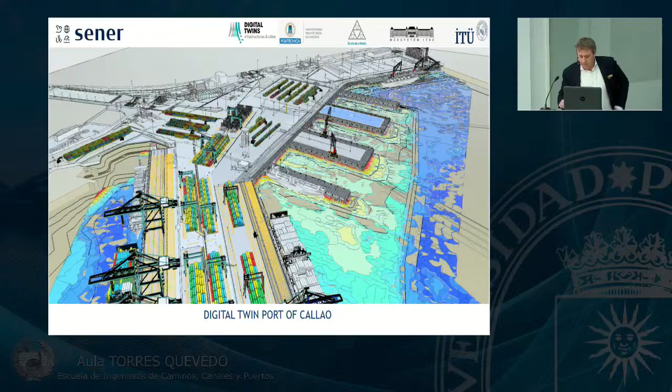Thank you, Ivan. Thank you, all of you. Okay, here we have the presentation. I will move a little bit so I will appear. I hope I will appear on YouTube also.

Today, I would like to introduce you to our project of the digital twin. It has been developed since 2018. We started working on that in 2018, and you will see our evolution. I have prepared a brief presentation, and after that we have 10-15 minutes for any doubts or consultancy that you have, so please take notes for the questions later.

First of all, this is the agenda of my conference today. I will give a brief summary about SENER, because maybe some of you don't know SENER. Then we will talk about digital twin - I have put a question mark here because all of you talk about digital twin, but I think we should agree on what a digital twin is. After that, the main purpose of the presentation is the use case of the digital twin in Callao Port, and finally we will have the Q&A.

So just a brief introduction on SENER. SENER is a multidisciplinary engineering firm that was founded by two brothers in 1956 in the north of Spain, in the Basque Country, in Getxo.

Okay, right now we are more or less 3,305 people working in SENER in more than 20 countries in the 5 continents. We have more or less right now projects in 90 different countries, which gives us a global overview of what is a project and what are the requirements of our clients.

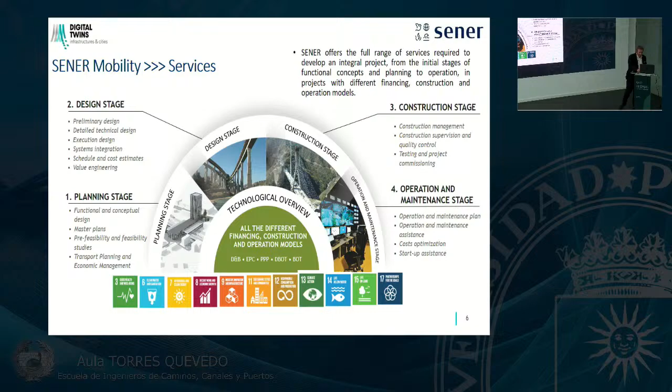And this is why we were one of the first companies in the world to develop a digital twin that is today what I will show you. In SENER, we are in digital engineering from the very beginning.

We start in 1967 with a software developed by SENER, called Foran, CAD/CAM software, 3D software, in 1967. So we have a large track record, more than 50 years, working in 3D in SENER.

First was the design of vessels. Then we moved to the aerospace and the energy. And in mobility, in the infrastructures area, our first BIM project was in 2006.

In 2006, we had 3 different 3D modeling BIM projects. One on a building, the high-speed station in Barcelona, then another high-speed in Logroño, and finally it was also the first port project in BIM. It was Hutchison Container Terminal in Barcelona, now called Best Terminal in Barcelona.

We were participating in that project, and we decided to implement BIM in that project. So the origin of SENER working in BIM, which is a part of a digital twin in ports, was in 2006. So we have a large track record working in BIM and digital solutions in ports.

Then we move, in 2012, we start doing BIM consultancy for others. Due to our experience inside, we are doing also consultancy services for our side. Then the BIM management and the digital project delivery. We create the BIM office in SENER in 2017.

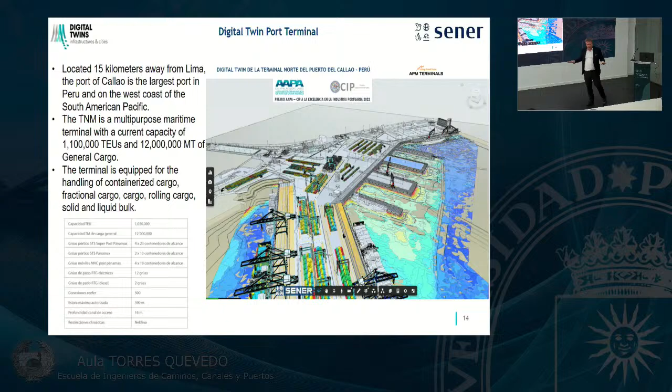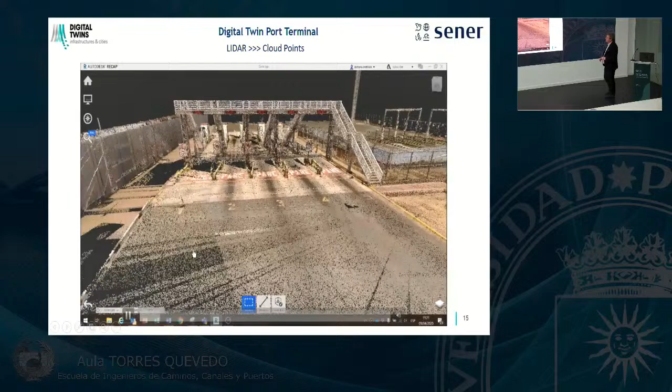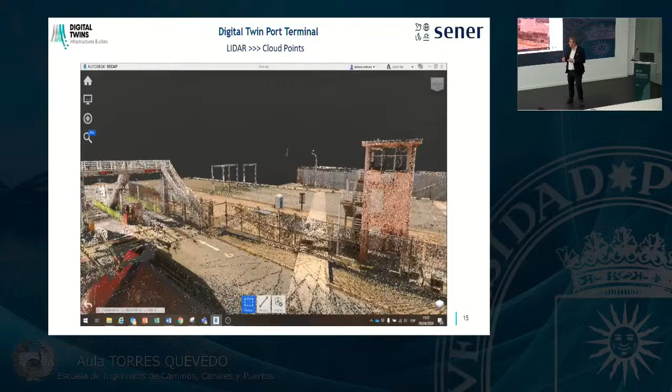With LiDAR, we scanned the whole terminal. We have a lot of cloud points with LiDAR, and also 360 photos that we did with our helmets, plus some sketches done by our team on site. We were able to build a 3D model of the terminal. The origin was a LiDAR scanning of the whole terminal. So with the LiDAR scanning and the 360 photos, we were able to build...

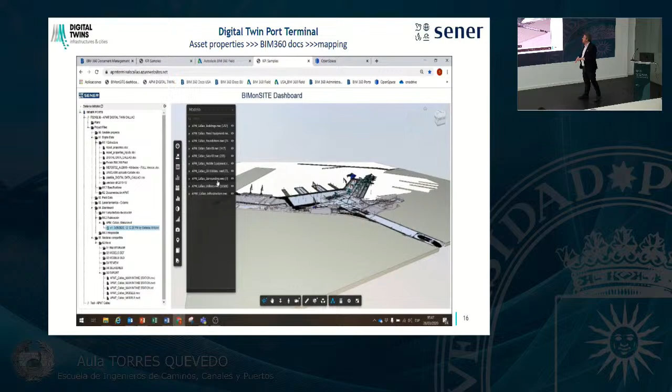Okay, the properties, it's running? Yes. The properties of this model. We are talking about a 3D model right now. So we structured, you see here at the left, the structure of the 3D model.

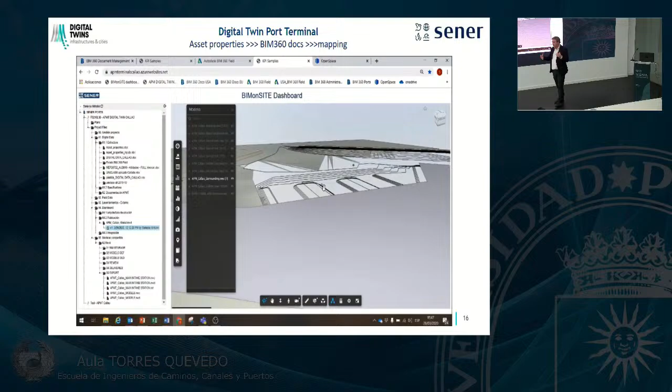The structure is not something we can choose with no criteria. The criteria was the way they were doing the maintenance and the operation. It's very important to structure the 3D model according to that. Why? Because of the chair. Remember the chair and the wheel.

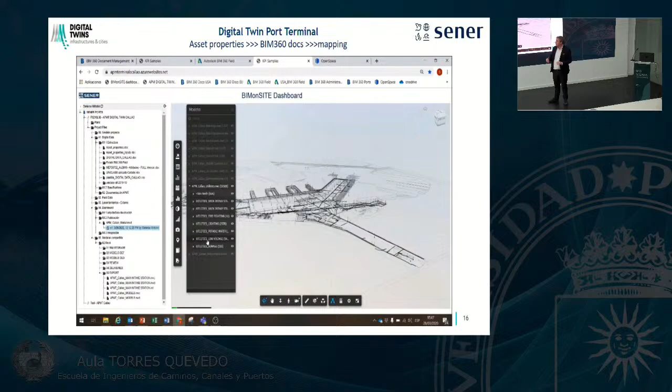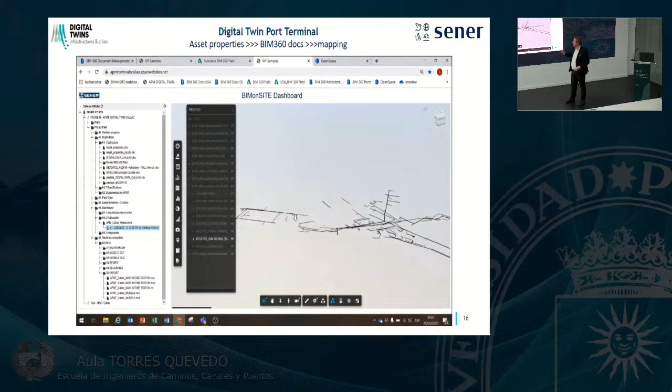So we defined the different utilities, low voltage, high voltage, all of that structured in different levels. But we have a 3D model of everything on site. And the starting point was the LiDAR. So with this, we have a clear mapping of all the infrastructure.

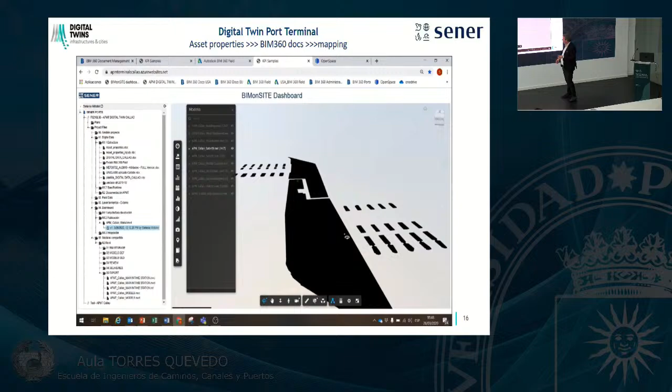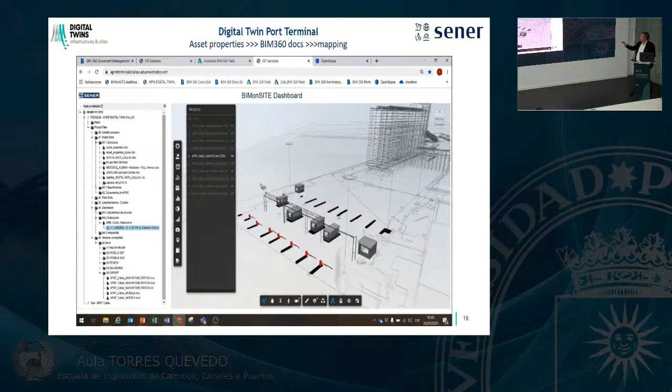Here you see the doors, the automated doors that we saw in the LiDAR before, and how we convert this LiDAR into a 3D model. So we now have a 3D model of the whole terminal. How's the time? I'm fine. So you see here the level of detail, you'll see later, but we structured the whole model.

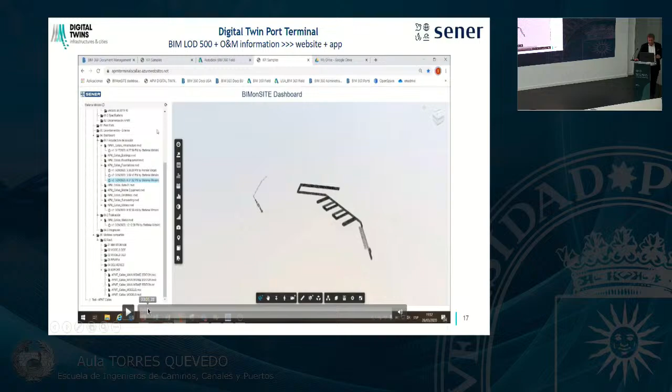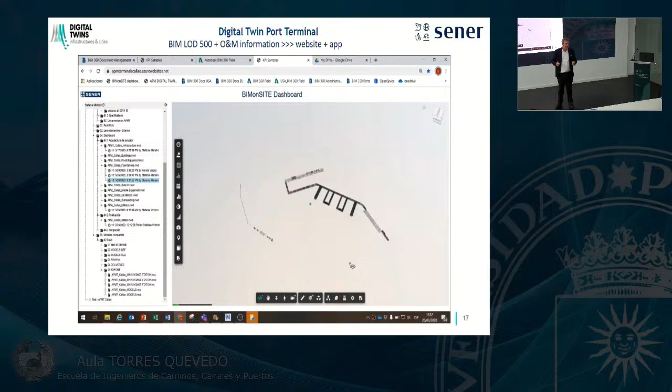Let's move on. As Ivan has said, we developed this in BIM LOD 500. It means field verification. Why? Because we are using this digital twin for operation and maintenance, so we need real, verified data on site. This is a key point.

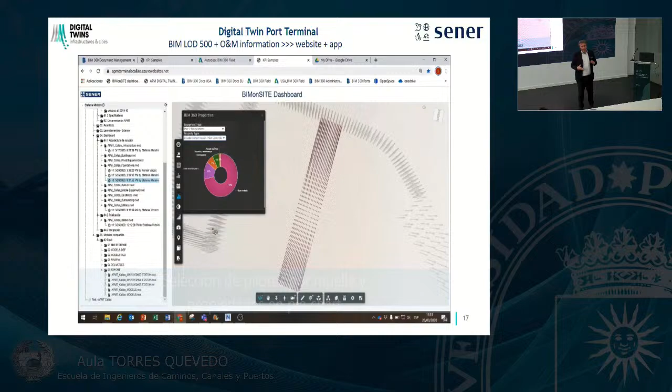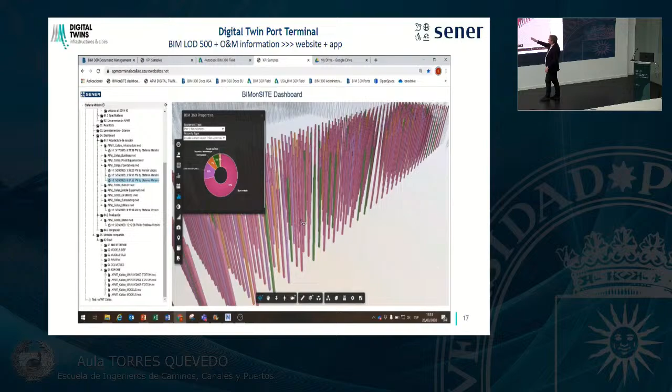So here, for example in this video, you'll see the piles, the foundation, the piles. Our client had a report of more than 3,000 pages about the status of the piles. We transformed these 3,000 pages into this model. You see each of the piles and its maintenance status. So the maintenance team is able, just by clicking, to see each pile and what maintenance activities have to be done on each one.

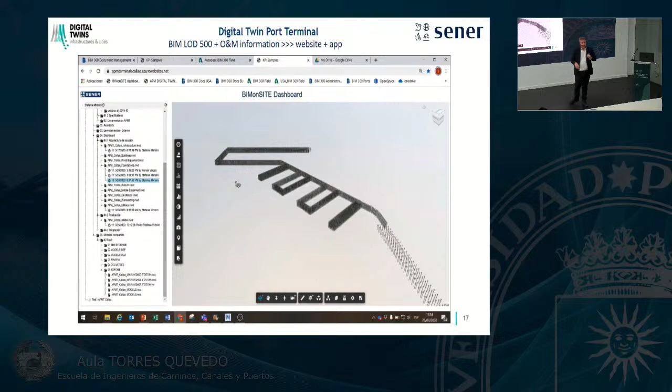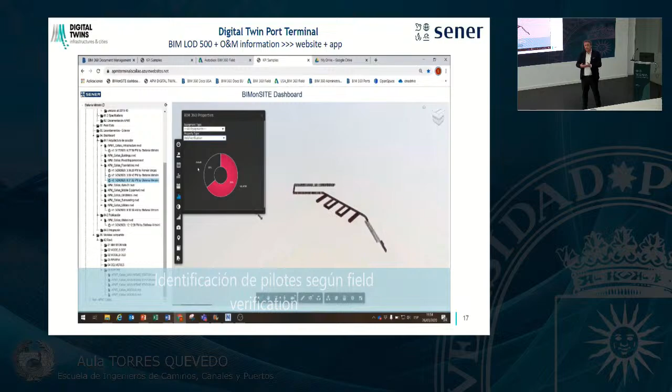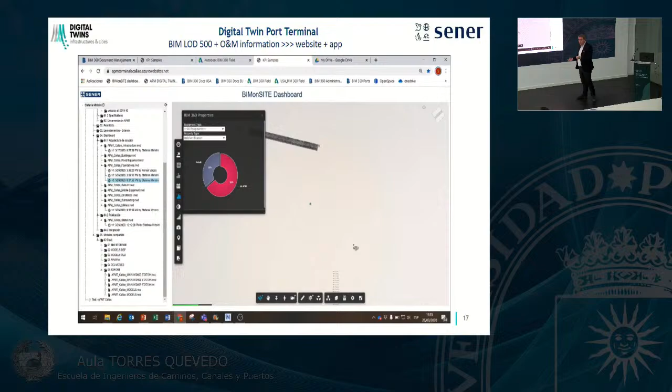And as you'll see later, they are able, with iPads or cell phones, once a maintenance activity is finished, to update the status of that pile automatically, so the BIM is updated. So the digital twin always has the updated information. Here you see the iPad, its appearance, the visualization the maintenance people had of the digital twin.

So they can go on site with a cell phone or iPad and see the checklist and all the details of each pile, what activities have to be done. Then they have to sign and put a photo. So everything has the history of each pile and its maintenance activities, including a photo. Everything is on an iPad, no papers on the terminal.

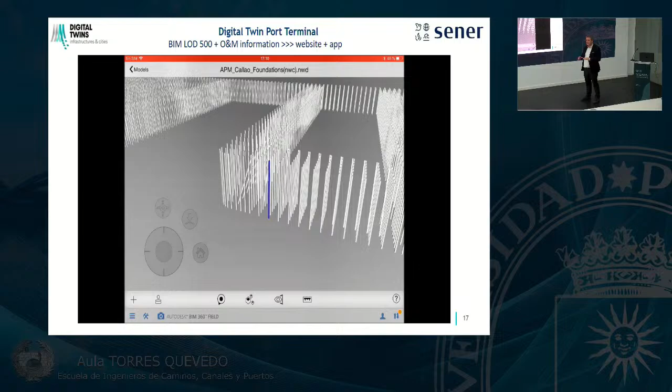Everything is synchronized in real time in both directions, which is a key point. This is very useful for the maintenance team. You can filter by the status of the foundation - which are repaired, by whom they have been repaired, and the different status options. This is in Spanish because our client asked us to do it in Spanish. The maintenance teams are using this: they go on site, see what they have to do, do the job, and then update it. All the team has the same information at the same time.

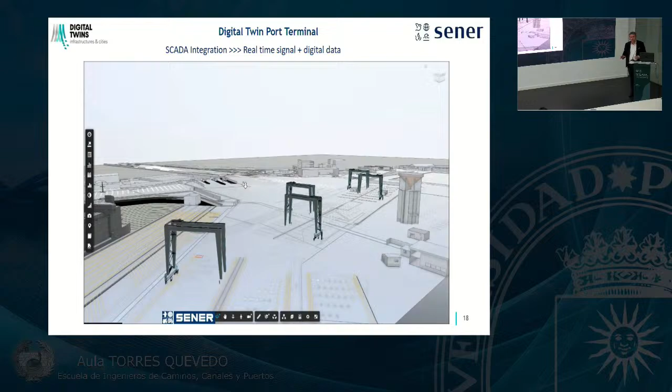More things. Then we move to operations. We have maintenance, let's do something regarding operations. First thing is to integrate SCADA, meaning real-time signal and digital data in real time on your phone, your iPad, your data.

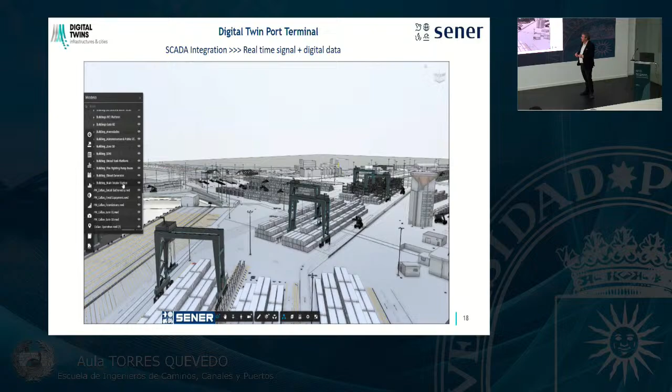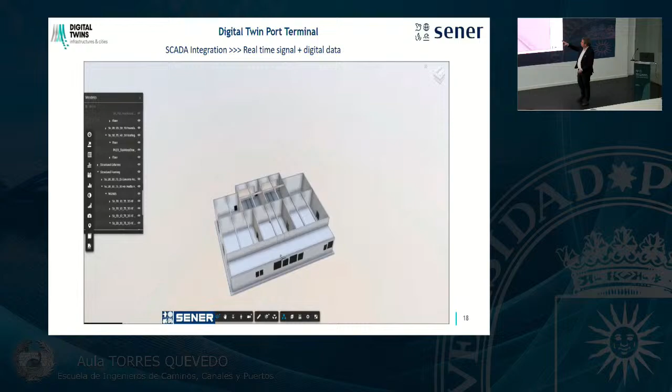Here you will see the main intake in the terminal. We've done the level of detail here, we can have all the information easily. Then we will move to the transformer and see the SCADA data related to the transformer in real time.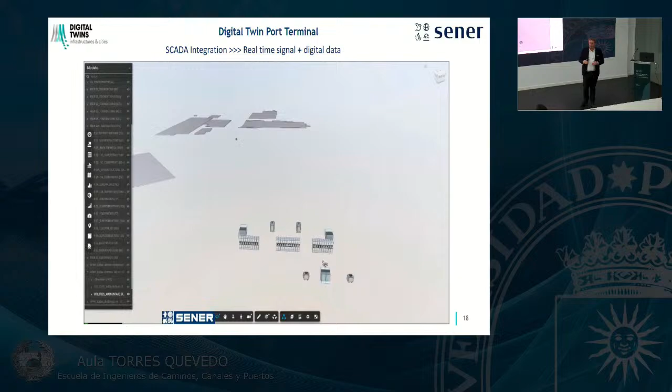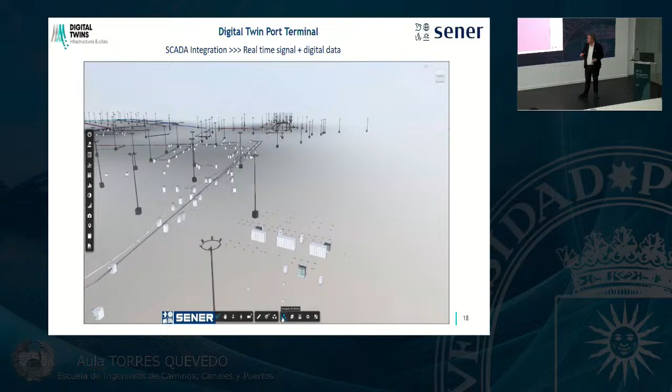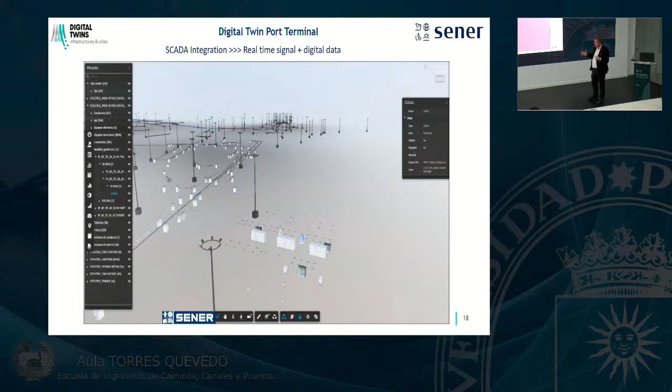We can put warnings on that. So if we achieve, say, 30 degrees of temperature, we can have a warning on the cell of the maintenance lead, and he can decide to send somebody there and decide if it is a problem or not. We can select the transformer, and on the same side, on your phone or laptop, you can see a brief summary of the main characteristics of the transformer.

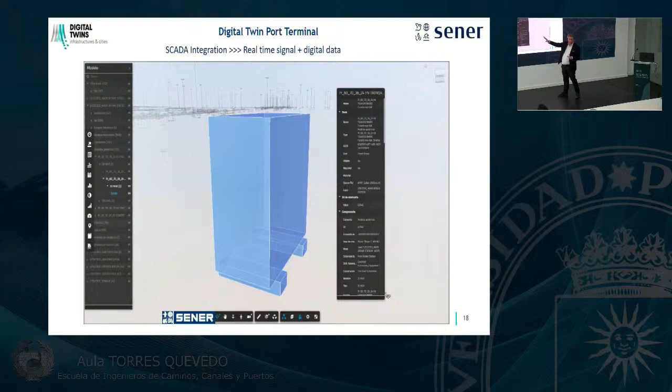The main characteristics - who was the vendor, whatever you want. Instead of going to a library to find the specifications of the transformer, you have a brief summary here. We are also linking drawings, technical specifications, technical requirements, vendor information - all of that can be linked. I think now you will see a drawing.

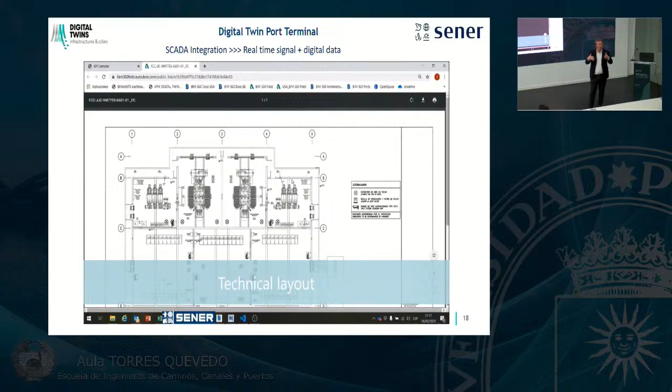Let's see - it comes, yes. Here we have a drawing. So we have the drawings, everything through the same portal or website. It's not needed to go to different parts - everything is connected, all the databases are connected and integrated.

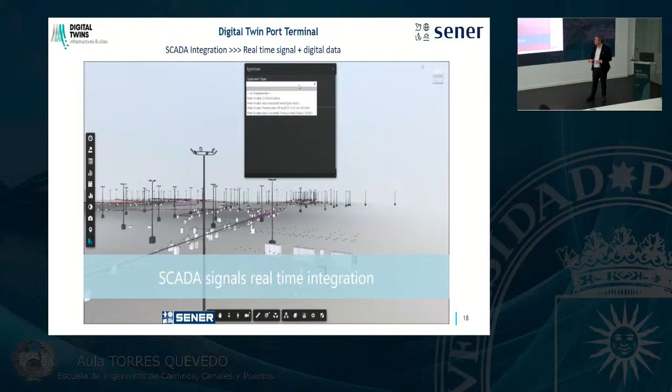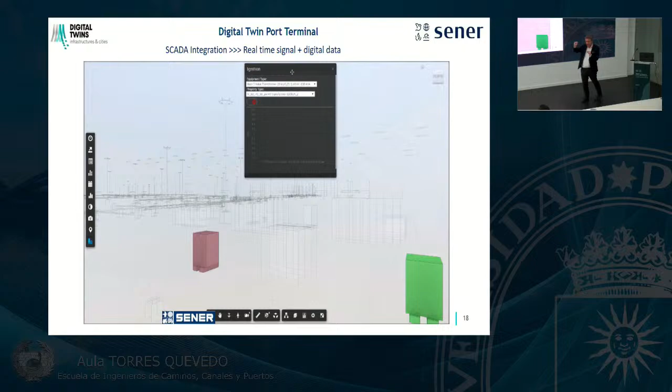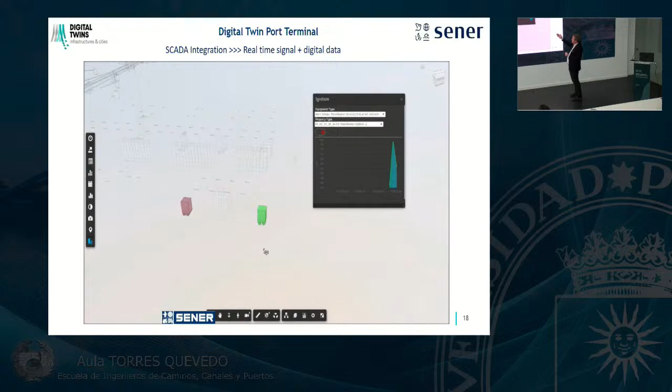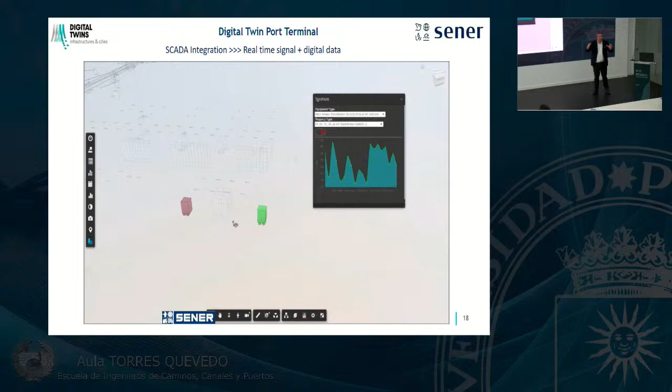Finally, here you have the SCADA, which is Ignition - that's the brand - and we are connected to Ignition, so we have a direct link to the SCADA, collecting the real data coming from it in terms of temperature or whatever characteristics we want. It's not needed to go to the SCADA to see the signal; we are connected directly to it, on the same website from any part of the world. The only thing you need is a good internet connection. Everything is connected, everything is integrated.

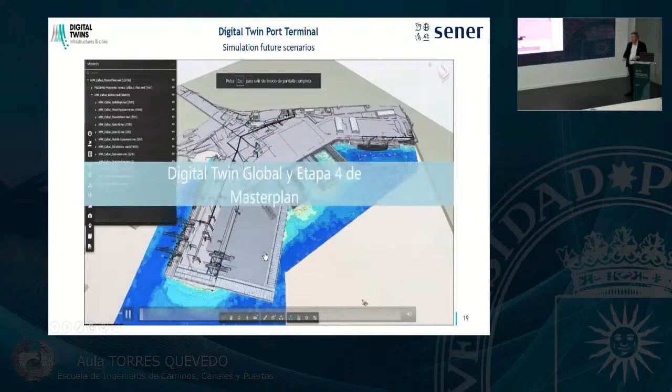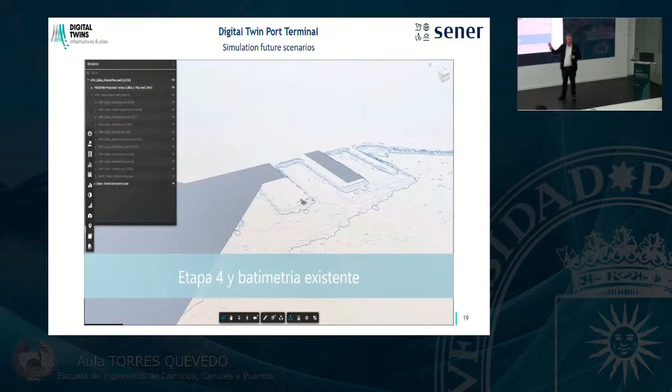More things. This terminal has to be enlarged. In SENER, we have done the master plan of this enlargement. One thing our client asked us is to simulate future scenarios - in this particular case, future scenarios of the civil works and utilities.

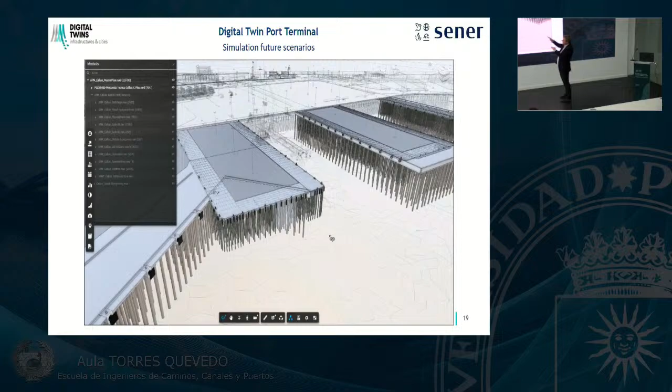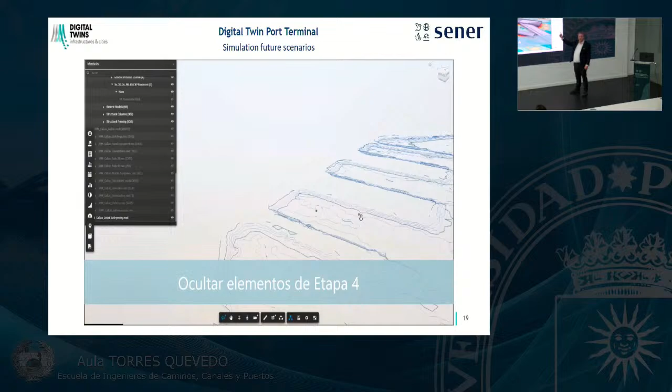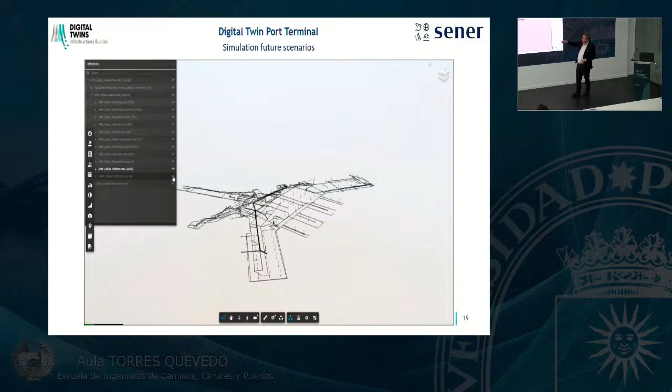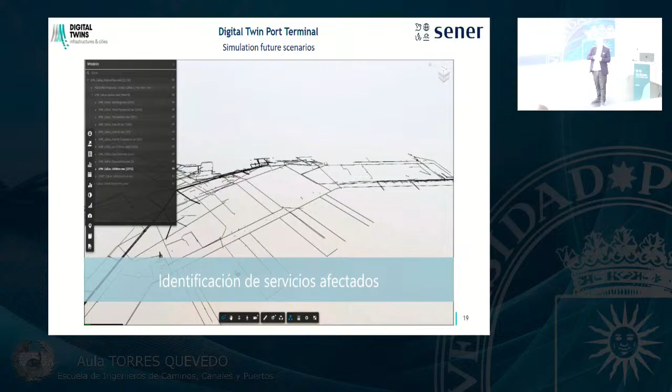Here you see the overlaps between the existing terminal and the future terminal. We can see which piles will be affected or not during construction, and which piles should be removed for the future stage. Instead of having the current project and future project and trying to overlap drawings in AutoCAD or whatever, we have this in 3D. It's very easy to see which piles are affected, which utilities are affected, all through the same digital twin. Everything is integrated and we are able to overlap different situations of the future terminal.

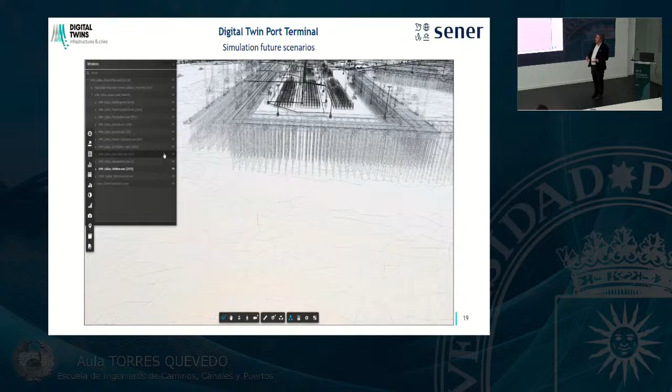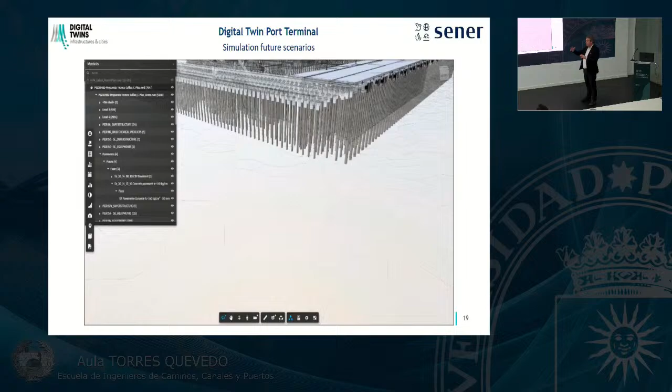This is future scenarios for construction. We have also done future scenarios for operation and for maintenance. Here you see the level of detail - it's LOD 500, as Ivan said, so we have 400 plus field verification, giving us maximum level of detail. Also what we see here is the different characteristics of the projects, the future project and the existing one. We can compare the size of the piles, the size of whatever.

So we have the two projects in one single window, okay? Which has a lot of advantages during construction. Let's move to operations, okay?

We have done simulations and emulation in the digital twin, which is one of, for me, the main advantages of a digital twin: to be able to simulate and emulate future scenarios of operation or maintenance.

Let's go to one of the main problems of Callao's port, and most ports in the world, but Callao's in particular: the access. There are a lot of queues of days to enter the port. Queues of days means a lot of money.

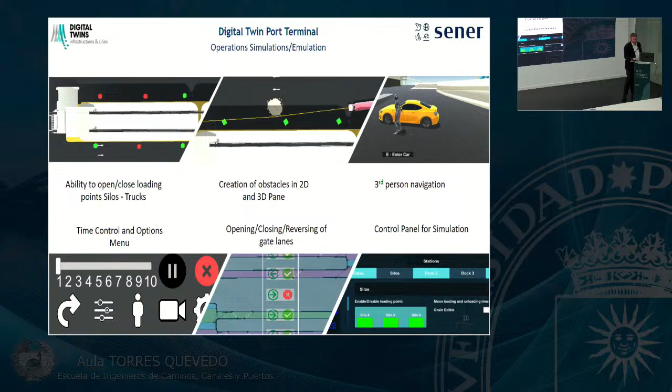To avoid that, we decided on automated gates for this terminal. We did simulations to find the best configuration of these automated gates.

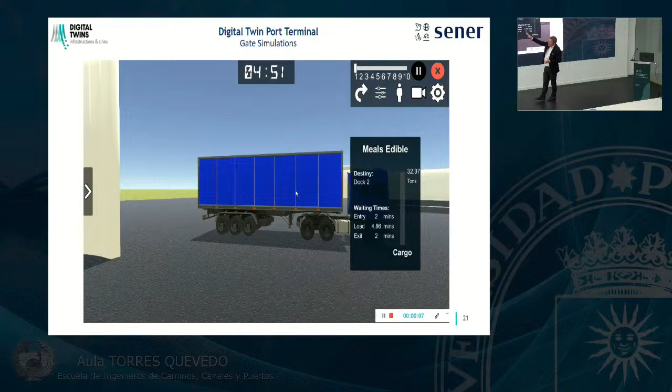You see here that there are 8, okay? But we did these simulations with 6, with 9, with 10, seeing pros and cons of the different number of gates.

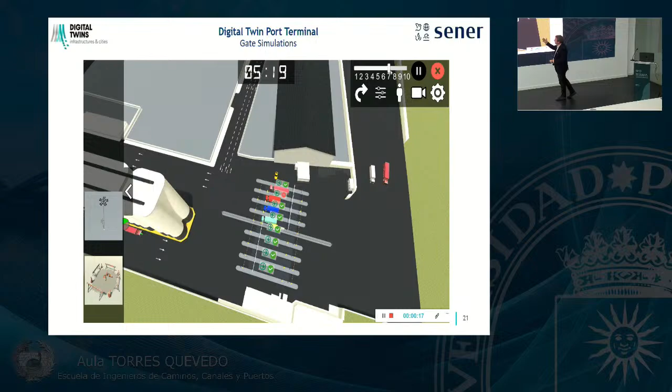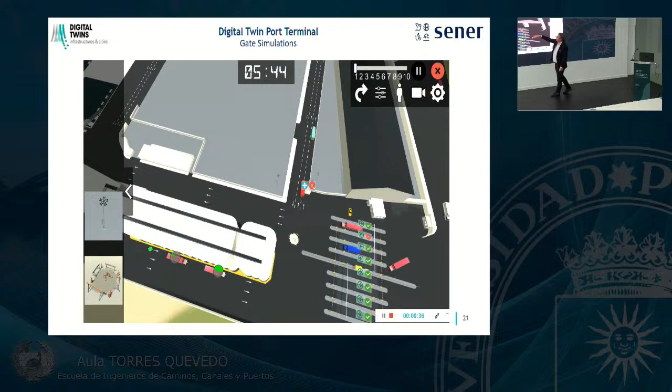Also, you see here that I'm able to close one gate, to put something related to maintenance, to put lights, and to see how, when I put a point here, it affects things. You will see with the red one how it has to move. So if it moves, it affects the queues here.

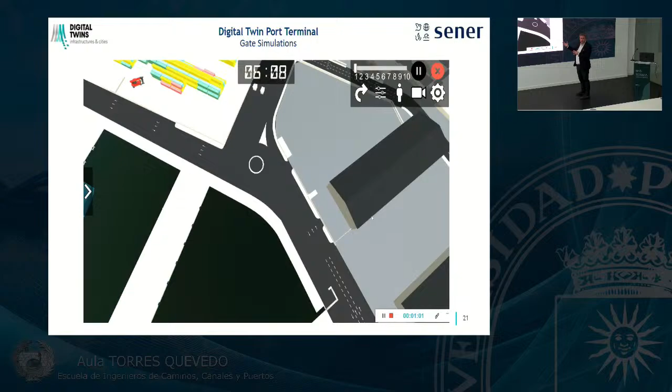So this was used for the design first and then for the operation. For the design, we had historical data of all the entrances to the port. With this historical data, we built our own algorithms in terms of how we should design the gates, and we were able to do that because we had the digital twin built.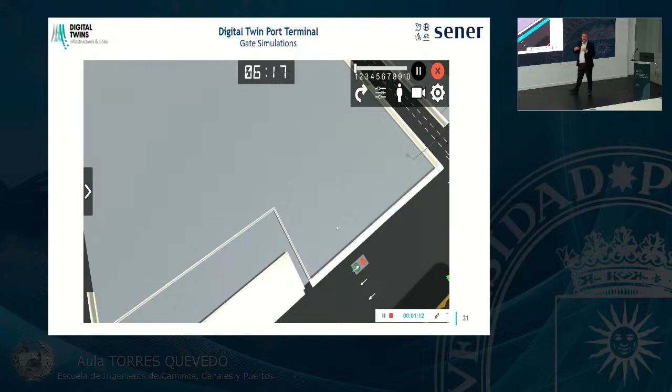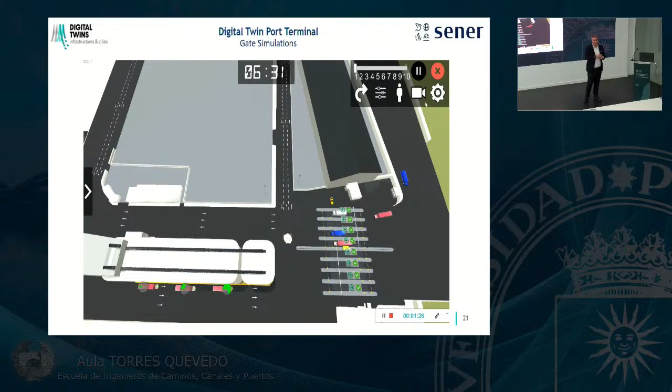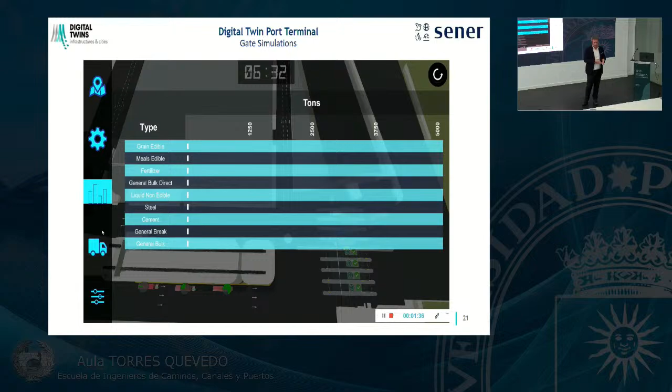So with this tool, we are improving the way that we design. I always say, when I teach in class, that ports should not be designed in the same way in 2024 that I started doing in 2000. We have new technologies, we have different tools, and it's not possible to design any infrastructure in the same way now as 20 years ago or 5 years ago. So this is a clear example of how technology and digital twin can support the design.

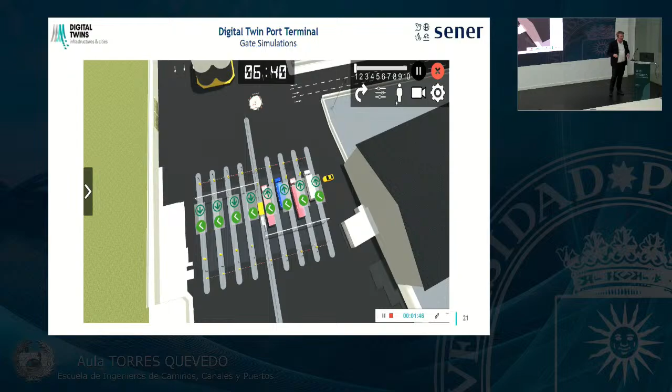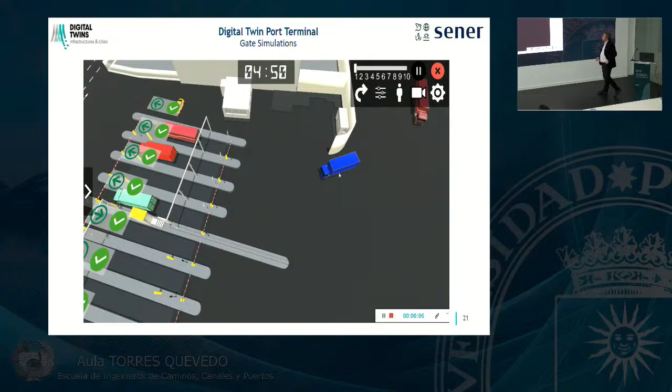Using simulations like this - well, here you see this is kind of fancy with the car running, okay. This is more a demonstration of the capabilities that we have, but let's move to see how these simulations affect things.

Now I will try to do that quickly. Here you see the difference between having all the gates open - this is moving quick - and half of the gates. Take a look here at how the queues are forming, how having 8 gates open or just 4 affects the queues you see.

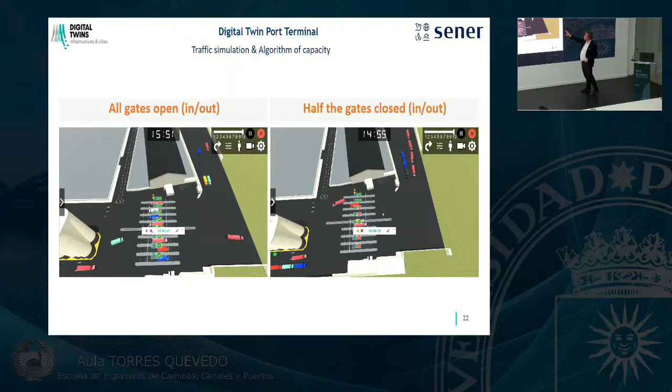So this is with real data. It allows us to do a good design, and we are able to support some part of the queues, not all of them, due to the space that we have. So we decided to put 8, because it was the minimum number of gates that allows us to have acceptable queues.

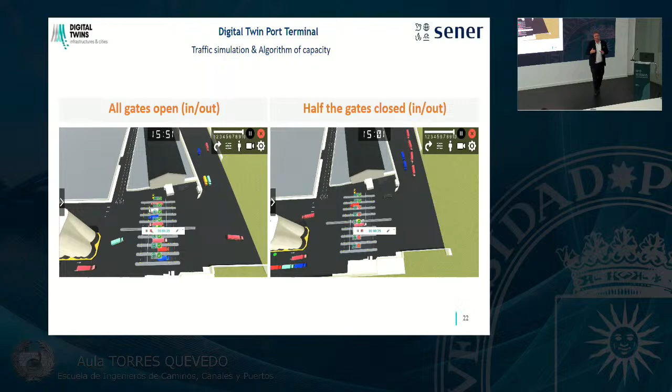But we did that also on the berth, to see, depending on if the berth is open or closed, how it affects things - you see the trucks here.

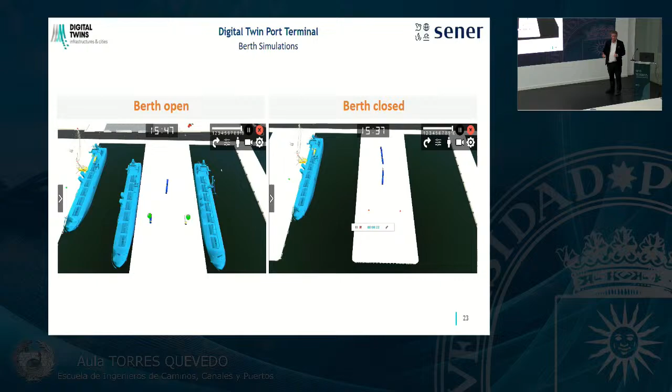So the potential of this digital twin is to see how we improve the design of new components like the automatic gate, but also, as you will see later, how we improve the operations - because this is a brownfield.

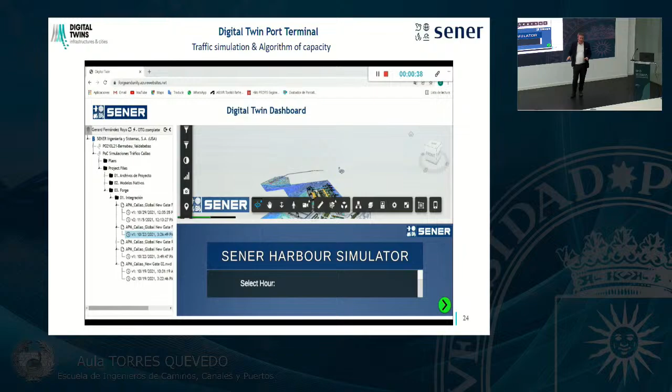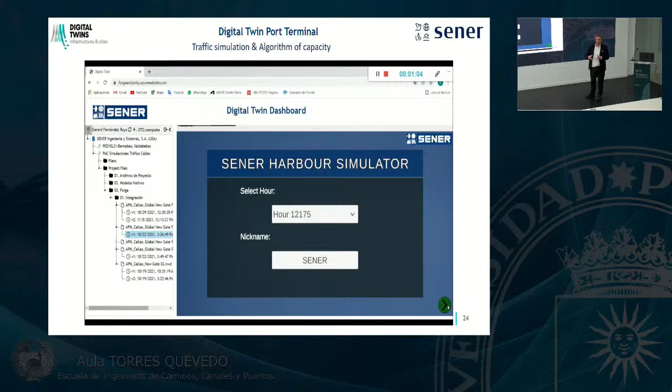So when we talk about operations, what we did is incorporate this digital twin - everything connected, everything integrated, as I said before, our simulator. So it's not needed to go to a separate simulation tool; we can do the simulations through the same window. Everything is integrated, everything is connected. Single source of truth - this is the concept of the digital twin.

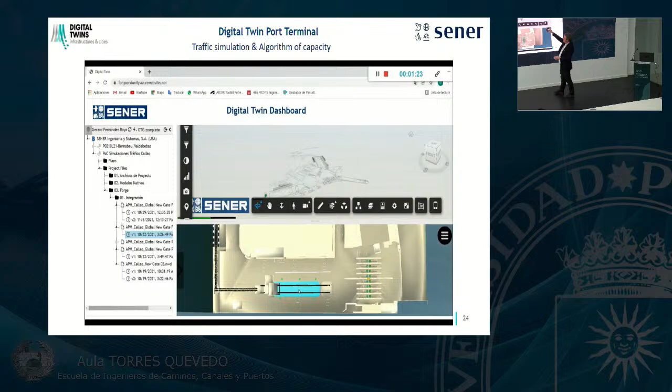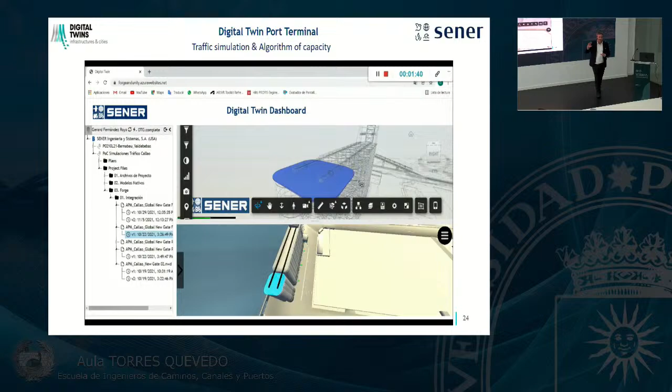So all of what you have seen, we have integrated. Any change on the model or digital twin affects the simulation. This is why we integrated that, because we want to use this tool for emulation - to improve the operations with real data in real time.

We were designing taking into account historical data. Now we have data due to the booking system that the terminal has. We know how many trucks will arrive in the next 3 days, 4 days, 5 days, and when they will arrive.

So we can decide which is the best moment to do the maintenance operations in the gates, for example. Because maybe next Wednesday I have 3 vessels arriving and a lot of trucks coming that have to dispatch all the freight in just 1 or 2 days. Maybe the best day to do the maintenance of the gates is next week on Monday, because I don't have any vessel, I will have less trucks in the terminal, so it's much better. So with this tool, the maintenance team knows when the vessels arrive, and they can decide when is the best moment to do the maintenance, in order to affect the operation the least.

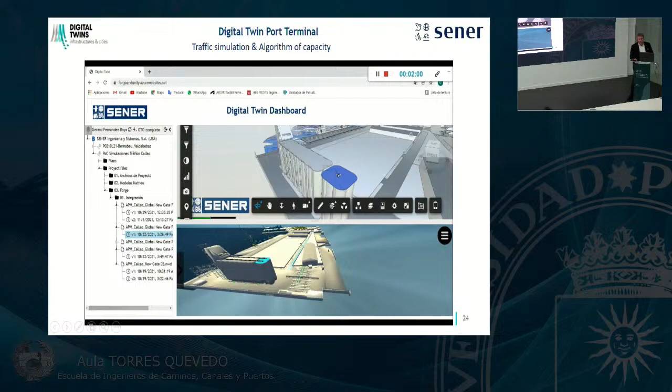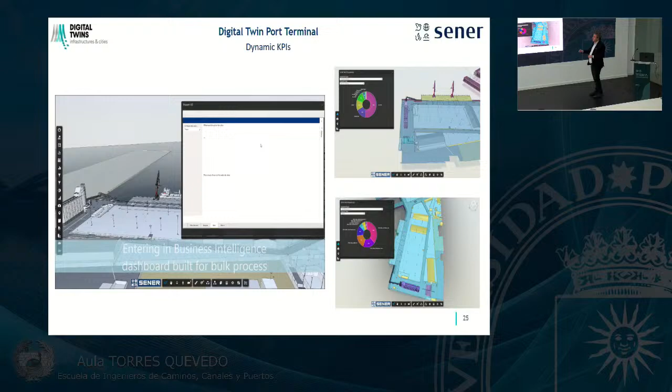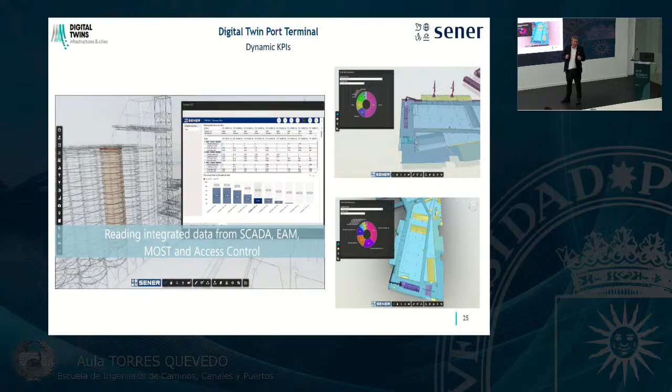And finally, we can have dynamic KPIs. Here we integrated this because there was a lot of discussion between the Port Authority and the concessionaire regarding some KPIs that are contractual, like the time that passes from the last mooring done on the vessel and the start of the discharge of the silos, for example. Now, as we have real-time information, there is no discussion. The Port Authority and the concessionaire have access to the same data, single source of truth, in real time. So there's no discussion on when we have finished the mooring of the vessels and when we have started the discharge of the freight. We integrate here the MOST, which is the software that controls the operations of the silos, but also the SCADA and different other softwares and tools. So with this we can have KPIs useful for contractual issues, for example.

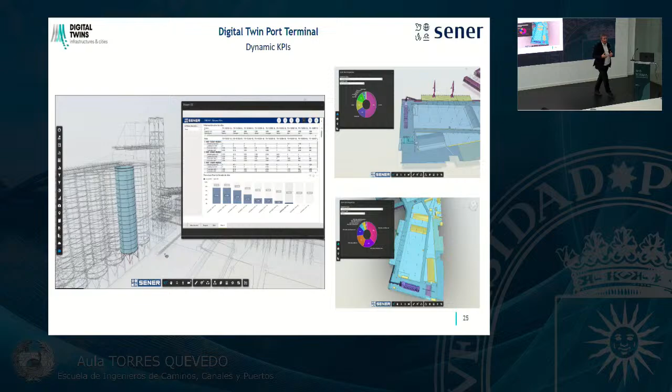So I think that's all I wanted to explain. I've been on time, so we have now 15 minutes for any discussions, questions, or whatever. Sorry if I've been so fast, but the organization has asked me to be sharp on that, so we have 15 minutes for anything you have. So I don't know if we have something on YouTube or not.

Nothing yet? Okay, I have a question. Well, first of all, thank you very much, it was a wonderful speech. It's an economical question.

You spoke at the beginning of the importance of analyzing beforehand what you want the digital twin for, and what are the needs you want to cover, what are the problems that you have. But from an economical standpoint, what is the cost of developing such a digital twin for a project of this complexity, and what is the economical gain in the course of the return on investment?

No? That's it. Okay, the cost, well, it depends a lot on many things. It's difficult to give you a figure on that. We are in projects of hundreds of thousands of euros to millions of euros, depending mainly on the status of, for example, the 3D model that could be given to us, perfect, no cost for us. Also, the number of softwares and tools you want to integrate.